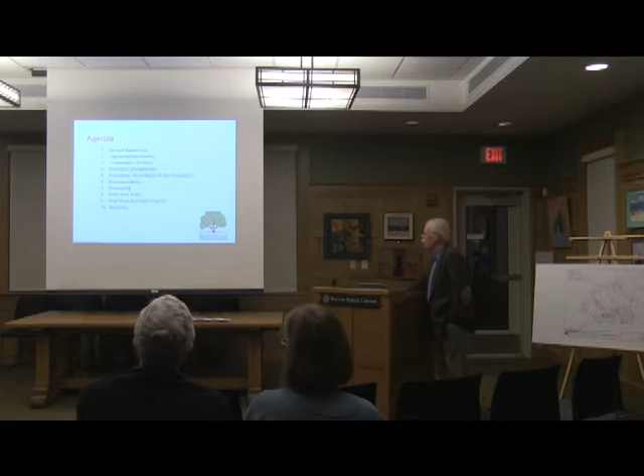Overall agenda: general background on where it was, how we organized the initiative itself, both from the project and fundraising side, and what we've gone through in terms of regulatory aspects, which are critically important. Environmental aspects, both in terms of contaminated land and soil, and water, as well as the wetlands issue - the site has a remarkable amount of wetlands on it, particularly up front near 117. Then we'll walk through the physical project: demolition and remediation, and what we call site preparation, which is basically where we've gotten to a large degree - preparing the site for building what will ultimately be the vision of the common.

What we're doing in terms of communication is a two-way street. We'll tell you what we're doing, and we'd like to hear what you think we ought to be doing, or whether it's working, or what you'd suggest we might add. Then we'll cover where we are with fundraising and near-term plans. I have a slideshow, about 6 or 7 minutes long, that gives you a perspective on pretty much everything that's gone on in the last 4 years. Actually, this project in total has been going on, believe it or not, for 7 years - 3 years before the trust got involved. So let me move on.

Background: after the town turned it down in 2011, the trust bought it, with Mass Development loans. Mass Development is just about the only outfit that has brownfield loans - they will loan money to people who are developing contaminated land, brownfields, into something useful, purposeful, and beneficial to the community or its economy. The primary objectives were to straighten out the environmental aspects, to turn the brownfield into something no longer contaminated and useful. At the same time, the trust certainly doesn't want to make money on this, but it doesn't want to lose money either. It's not a big organization.

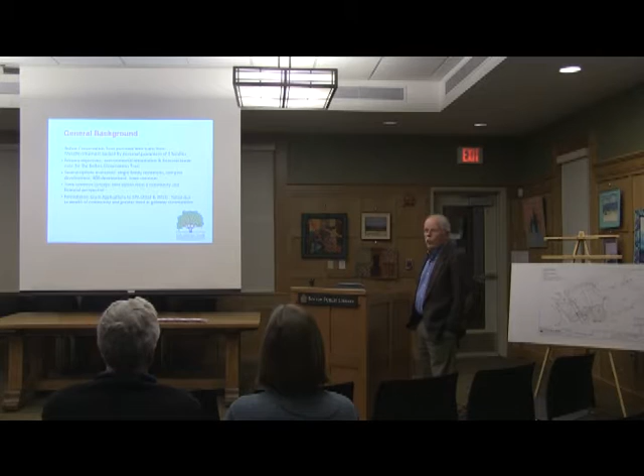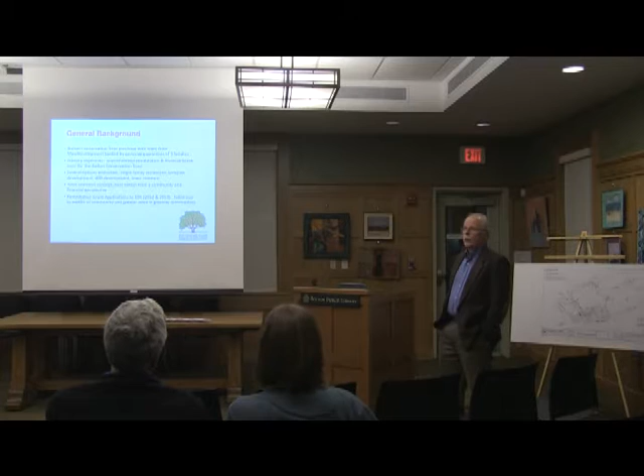You wonder why things have suddenly taken off in the last year with our fundraising. Two primary reasons. One, we spent a great deal of time looking at alternatives for development of this land - single-family residences, even 40Bs, compact zoning, a number of things. No matter what we did, it didn't work. As I said, one of the biggest issues is the amount of wetlands on the land. Although up and back, where it rises, there are fewer wetlands, it's not particularly appropriate for any kind of development, nor did we feel it would be appropriate to do so.

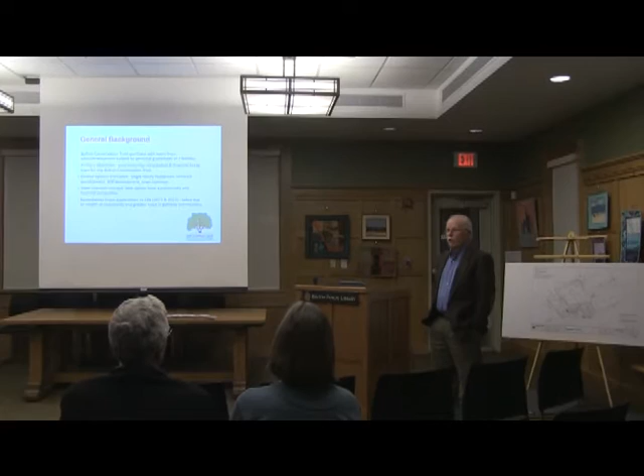We also spent a lot of time working to get grant money from the EPA. The EPA gives out grant money for brownfield redevelopment. We tried twice, very hard, and both times we were not given the grant. The message from the EPA was: you folks are the second richest town in central Massachusetts, and in terms of needs elsewhere in the Commonwealth, there are far greater needs. In both cases, the grants went to gateway communities, most recently New Bedford and Springfield in 2013.

In organizing the initiative, what was really practical was pulling together a team with fairly large group meetings, starting off with just generally getting concepts of how people saw the thing coming together. That coalesced more and more, so by the time we got through our 4th meeting in September of 2014, we had a pretty good idea of what the key elements of the project would be, and those key elements would be reflected in the organization.

The organization looks like that, and the reason it's illustrated that way is the incredible connectivity among the elements of the organization. We have a steering committee in the middle that's responsible for coordinating the elements of the organization, but we have 7 individual elements and groups.

The communications team on top, fundraising, of course—it's the most aggressive fundraising effort the town has ever seen on a private basis, in terms of the percentage of private funding going into the project. Construction, and that's construction and remediation. Of course, the finance. The charrette, you will go into in a bit.

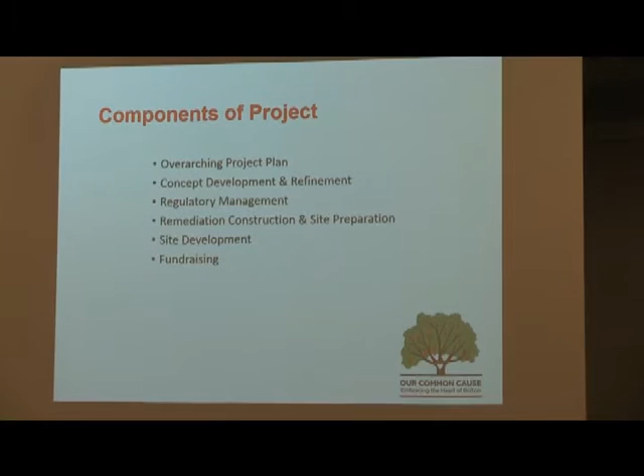Once we got our organization together and figured out where we should go conceptually, clearly we had to have a plan. We had to figure out, once we had a general idea of where we were going, what we needed to do in terms of developing the concept for the common and refining that to something buildable.

We simultaneously had to run a substantial amount of regulatory management, and that was basically 3 areas. One was the investigation and remediation of contaminated soil and groundwater, but we also had to deal with wetlands, and more normal administrative aspects of doing anything in a community like this—building permits, site plans, etc. Then the site development, meaning actually building out the site once we've gotten the contamination taken care of and the site itself prepared to take its ultimate development, and then finally the fundraising.

The overarching plan is a very large plan, very carefully put together. It's had a number of revisions. It's a living plan, now on Rev 4. You can't read that—I certainly can't read that at this distance. But that's basically all of the elements of the plan. Attached to that, each individual element has a plan of its own, which is updated. Some of them, I'm delighted to say, have accomplished their objectives and now have been archived for posterity.

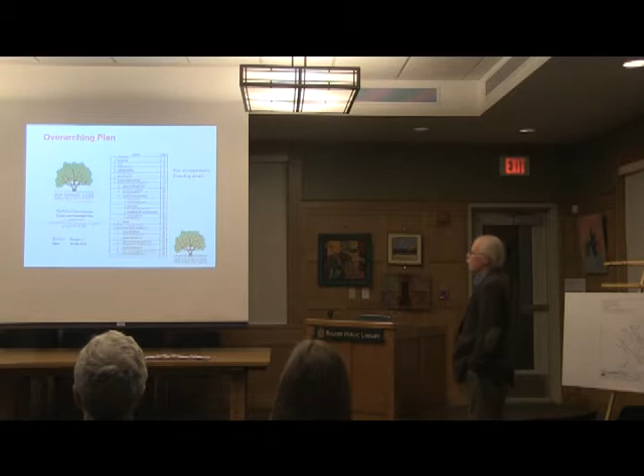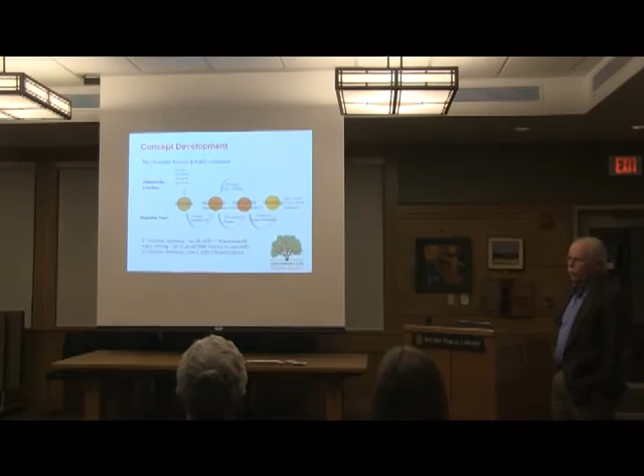So we had a plan. You saw, no doubt, the end of year before last, beginning of last year, a charrette process. We brought together 25 people with about 7 support people. We came up with a developed set of concepts. We brought those out to the public.

The public came back with some 900 comments. To a large degree, they were pretty easy to group. We incorporated them, and we came up with another charrette workshop and integrated all of the comments to the degree that we could into a single concept. That concept was put together and presented in the unveiling at the International on March 27th this year.

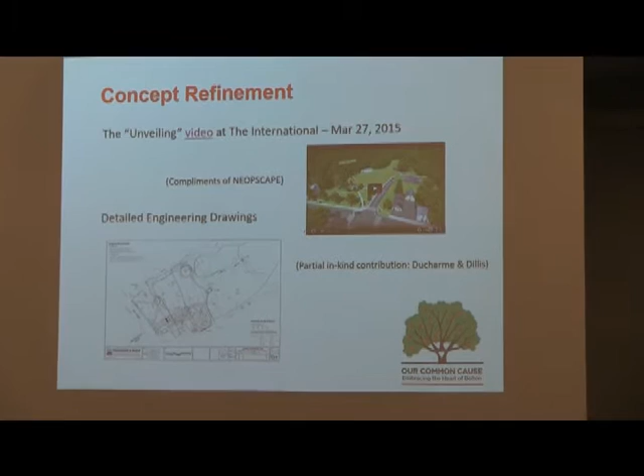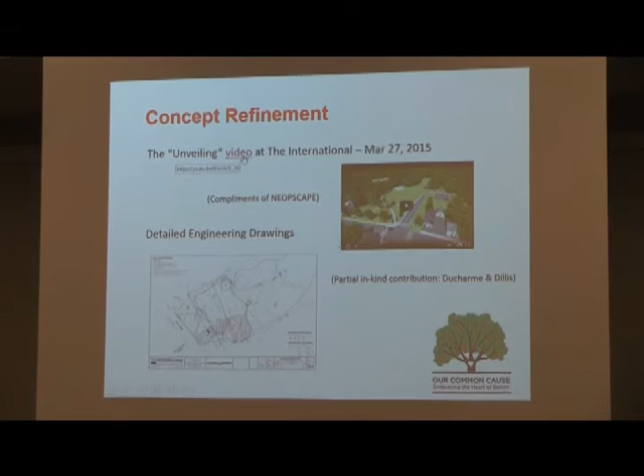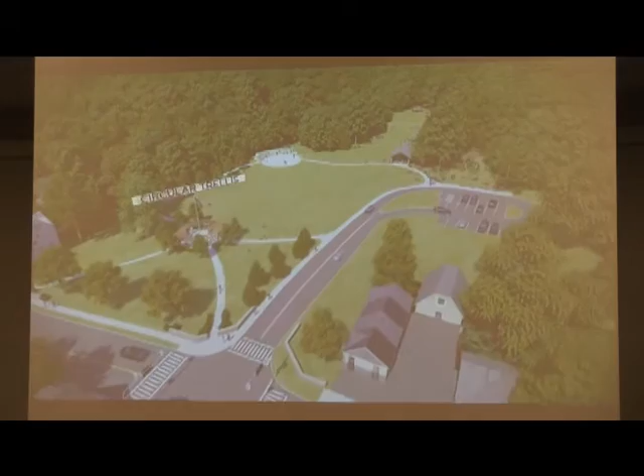This was the video presentation that Neoscape did for us for the unveiling. That basically reflected the concept coming out of the charrette.

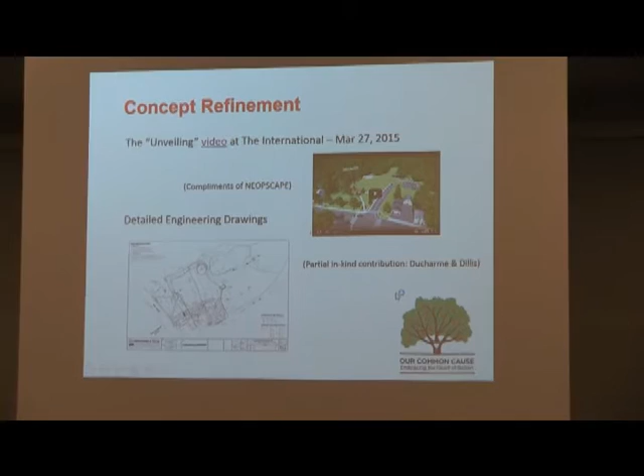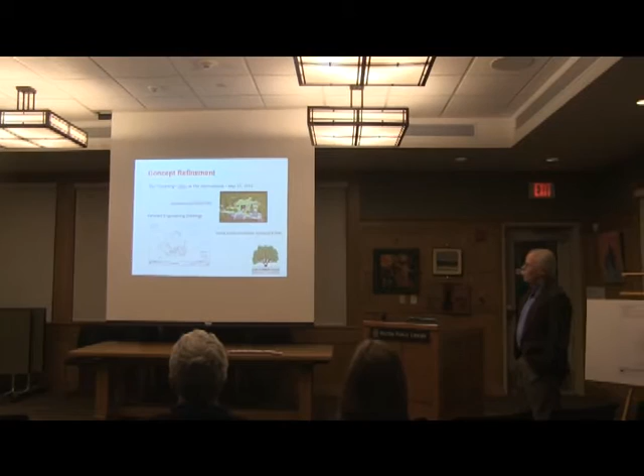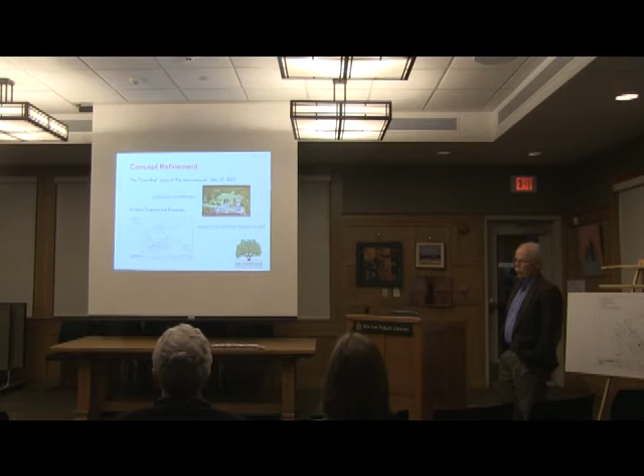So we came up with the concept, we presented the concept, and then in order to actually build it, we had to go through detailed engineering. Ducharme and Dillis put together the detailed engineering for us, which was substantially more complicated than it would appear from here. We had to have drainage plans, site reviews—a great deal of engineering went into it. Frankly, a lot of engineering went into it to make the construction easier and less expensive. It could have been a very straightforward but very expensive process had they not put a lot of thought into how to do it.

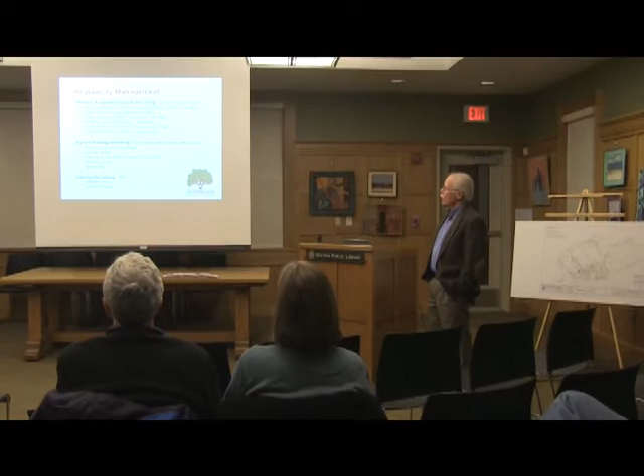Regulatory management: wetlands, I mentioned. We had to go through a whole series of interfaces with the Conservation Commission. Right up front, we had to come up with a complete ANRAD—an abbreviated notice of resource area delineation. That basically covers all the natural resources on the site: rare species, wetlands, et cetera. That had a lot of drawings and 34 pages.

They issued a response to that, basically endorsed it. We're absolutely delighted—the people who put together our documents had no problem with the regulatory authorities. They came back quite happy and in agreement. Same thing with the wetlands when we did the demolition.

When we did the construction, an enormous amount of engineering calculation went into that. Our notice of intent was the biggest we've ever seen, 110 pages. But it was well enough done that it got completely turned around and endorsed very quickly.

And then the usual site and building permitting, the demolition permits. In the case of 715, that took 9 months. Site plan review, again, great development of the permit applications, and consequently relatively few comments, some very good suggestions.

And then as we started towards demolition, we discovered that there's asbestos in everything. Things such as the tile and the floors put in the 50s were strengthened with asbestos. The glue on the ceiling tiles was asbestos to strengthen them. Even the glazing in the windows was asbestos, so it all had to be removed, packaged, and shipped to a location in Ohio.

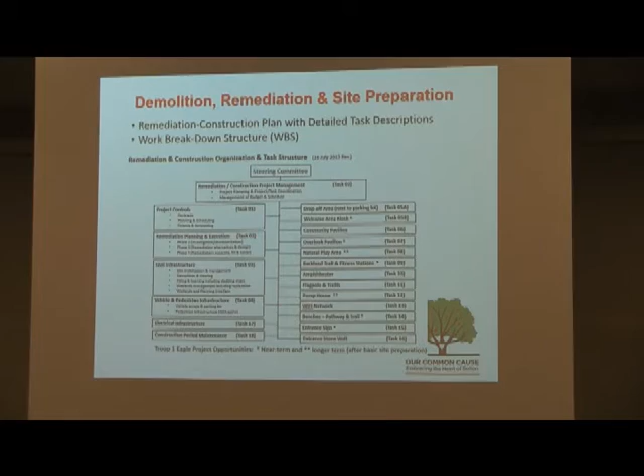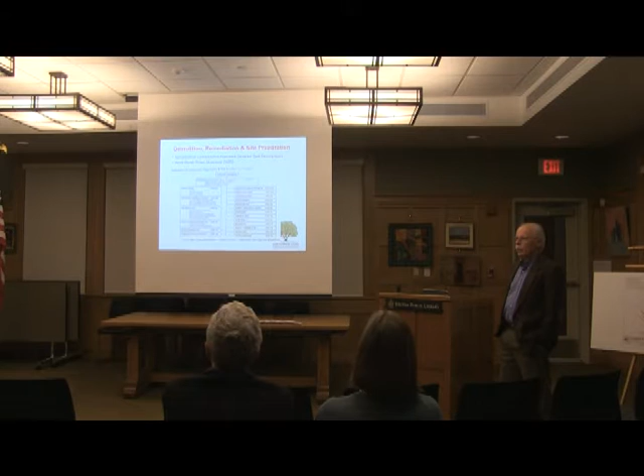Once we got through that, we had to figure out what we were going to do to actually build this thing. These are basically the elements of the project management plan for construction, all of the tasks. The ones on the left are building out the civil infrastructure, doing all the drainage, the filling, the road work, the parking lot, and by the beginning of spring we'll get to putting in loam and grass. On the right are all the physical elements beyond that, which, assuming we have the appropriate funding, we'll go ahead and build out next year.

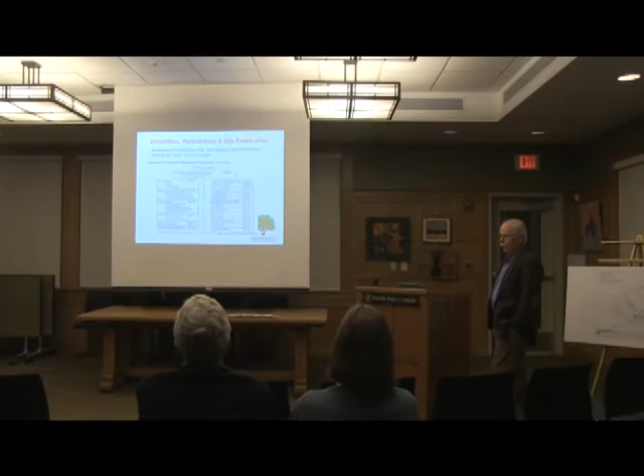The one thing I think is very impressive is the number of people who have volunteered to either lead, be a very important part of, or completely handle a number of these elements. The amount of in-kind support we've gotten from very experienced people with amazing resources, heavy equipment, fill, and a lot of expertise and advice has been incredible. I've never done a project with volunteers before of this size. It's a $1.5 million project, and without volunteers, doing it with a general contractor would have been twice that. It's just been great to have.

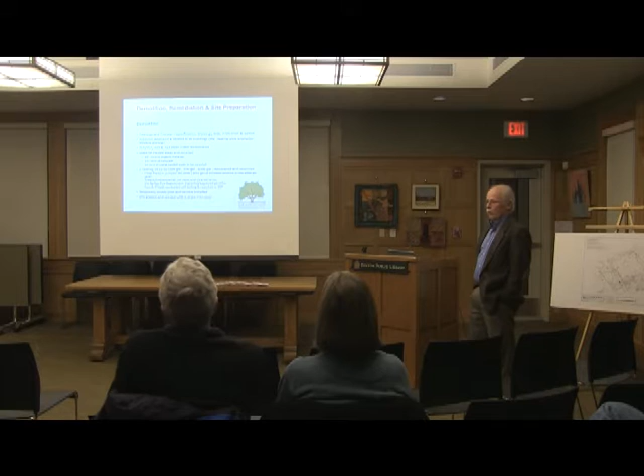The demolition, which was the first activity, was a very interesting experience. We thought we were demolishing buildings, and we were discovering tanks that we were not aware of. Nobody was aware of them. We thought all the tanks had been pulled and all those investigations had been done, and that wasn't the case. We found 3 more tanks.

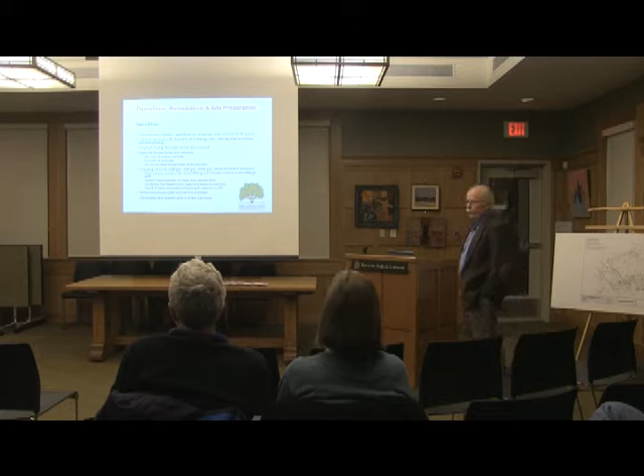We recycled everything. Everything went back up to Devens recycling. The organic material, basically wood, 187 tons of that, over 300 tons of concrete, and an enormous amount of metal. We pulled out all the I-beams and they went over to Reisner in Clinton, and we had some tanks that went to Reisner too after they'd been carefully cleaned. I think our greatest success was finally getting Verizon and National Grid to work together to remove a telephone pole. It took 10 people and 4 trucks, but we made it happen.

Remediation basically went ahead once we had the phase 4 requirements from our licensed site professional. We identified the truckers, the disposal facilities, and 2 primary types of contamination: one was petroleum, of which there was a great deal, and the other was lead, and they had to be disposed separately. As we excavated the areas where the wells and testing told us we had substantial contamination, we had to continually test to make sure we'd gotten it all.

And frankly, with petroleum, we hadn't gotten it all, and we had to dig again to get to the point where we were no longer detecting that level. So bottom line, 227 tons of soil went off to Maine, and 23 tons of lead was transshipped through New Jersey. Everybody kids about when you want to get rid of waste, you send it to New Jersey - no, it was the truckers who transshipped it to an appropriate disposal site.

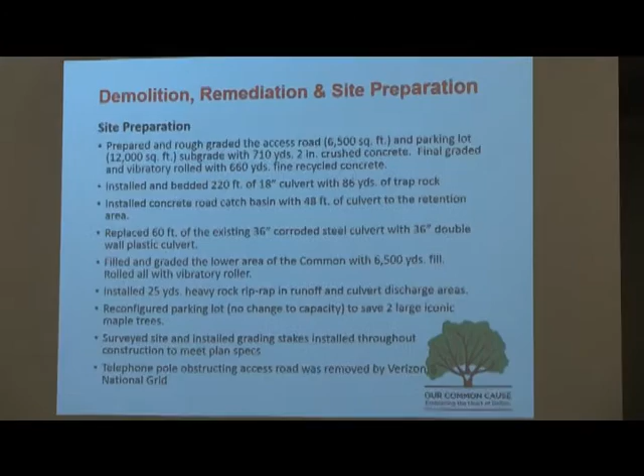Yeah, that's the theory. And in the end, when all of this is finished, there will be what's called an AUL, which will be registered with the land. That's an activity and use limitation document, which will actually lay out exactly where this stuff was, so you know - it's sort of like DigSafe. You need to know where it is, and that will be part of the outcome of all of this.

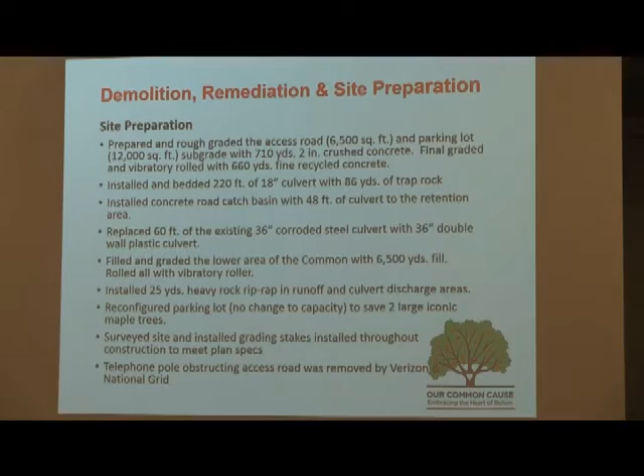Site preparation is all the activity that you saw going on with all the heavy equipment and trucks coming in the last 3 months. We did the rough grading. We put in a staggering amount - 1,500 cubic yards of crushed concrete and gravel in the driveways. I think I can say with certainty that the base for the road going into the common is better than 117.

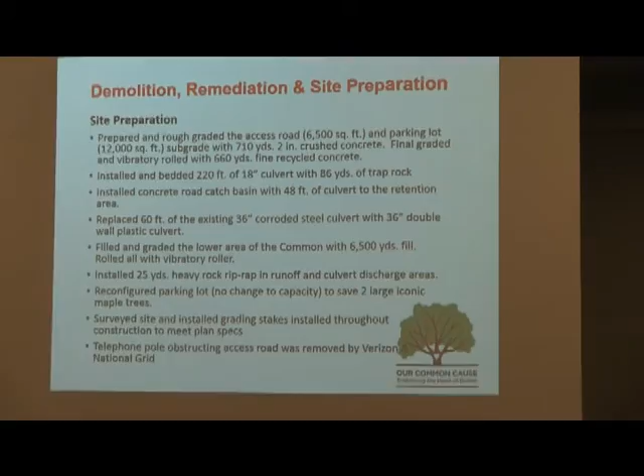Some people say - I'm not saying it - but all kidding aside, it's been very well done. It was done very professionally. We put in a great deal of culvert.

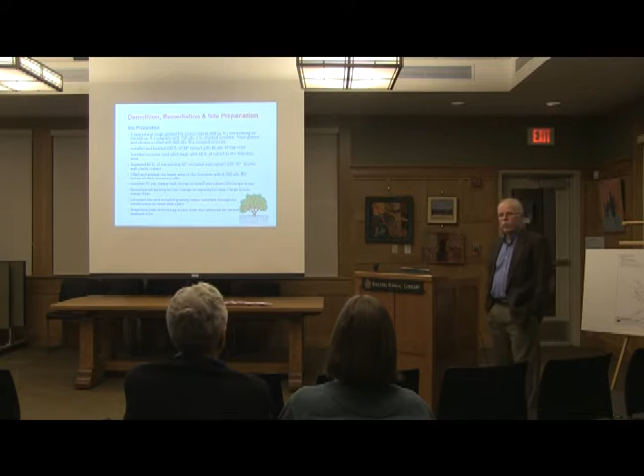One of the things we had to do was address Great Brook, which runs right through the center of the lower section of the common, through a 36-inch culvert. There was concern that in a 100-year flood it would overtop that culvert. Rather than open it all up and completely redo the culvert work, we reached agreement with the Conservation Commission using a very innovative approach suggested by Ducharme and Dillis: we would put a parallel culvert above the 36-inch culvert, so that if it ever did overtop, it would go through this long culvert and not do any damage or back up to the upstream properties.

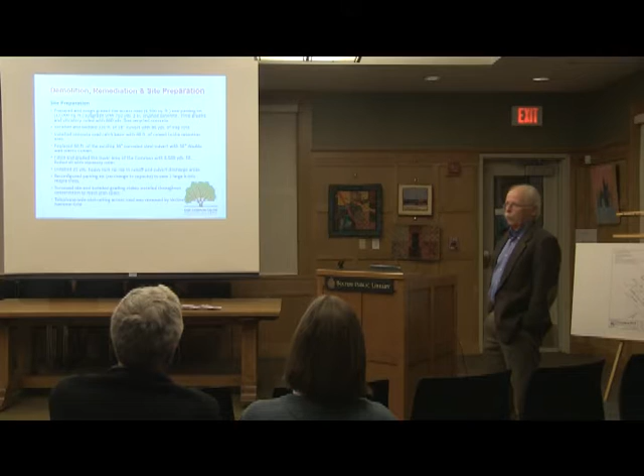So we put in 220 feet of culvert, which is not a small job in itself. Then, much to our disgruntlement, we discovered that the 36-inch culvert we depended on, and over which we were going to put the road, was completely corroded. We were going to do a quick check - we pulled in excavators, uncovered it to take a look, and in good conscience could not continue. We just ripped it all out and started over again.

We put in a total of almost 8,000 cubic yards of fill, which is why it looks nice and reasonably flat out there and looks much more like a common than it did before.

That was very carefully graded to get the runoff to come down the way it needed to and pass through those cones. One thing we changed from the original plans, once we started grading the parking lot, we saw 2 huge iconic maple trees on the east end and just didn't have the heart to cut those trees down, so we actually moved the parking lot. At the end of the parking lot you see those 2 huge maples, which we're very happy about.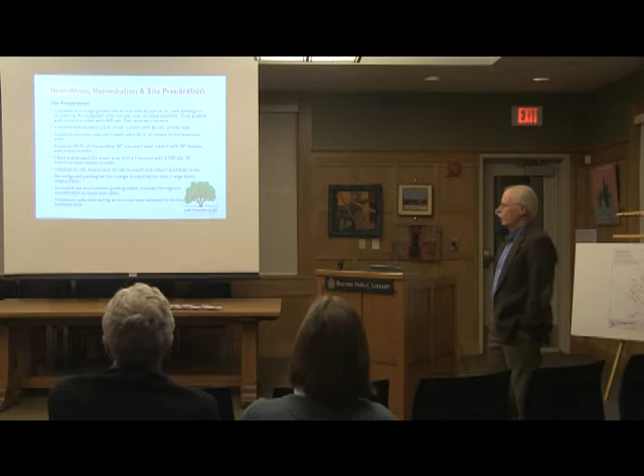And then, as I mentioned, we had that wonderful experience with Verizon International Group. In terms of site development, going beyond site preparation, the Boy Scouts in Troop 1, Dan Gaffney's son Jack, this was his Eagle Scout project, got a whole team together and with the support of Doug Story, being our expert on the scene, built the upper pavilion, which was used for Santa Claus during the tree. And then very recently, Rich Pelletier donated a pergola, and actually was down there constructing it with us.

So those are the two things that you see. In terms of future work, the next thing you'll see is going to be the loam. We need to get loam in there fairly quickly and seed it. Not just to make it look pretty, but to make sure that we stabilize the site and eliminate potential erosion in the future.

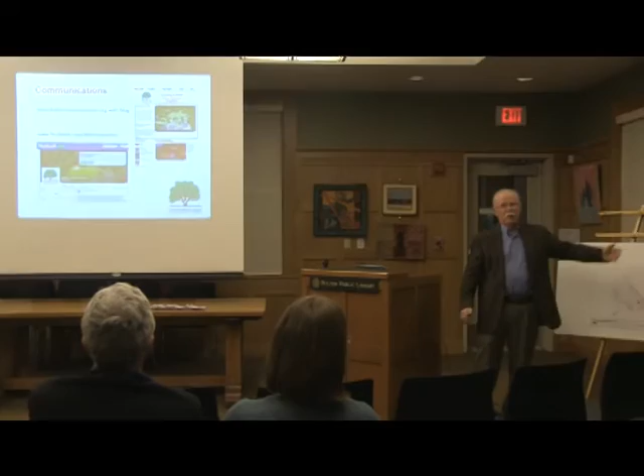Communications, you want to talk for a second about it? Sure, put you on the spot. Hi, I think I know most everyone. Meg O'Leary, I'm the co-chair with Bob.

On the communications front, communication is a tricky thing. Sometimes people say you're reaching out to us too much; other people ask where the communication is going to be. So you never know if you're hitting the right cadence. But we are trying to be as transparent as possible and keep people up to date. If you read the Bolton Independent, there's almost something in there every week, whether it's an event we're having or an article about our progress. We keep a blog on boltontowncommon.org that we try to update regularly with project information. Facebook has about 450 people following it, and we get great engagement there, so anytime we put something on the blog, we also promote it through Facebook.

And also, hopefully you're getting email updates, as well as through the Bolton Conservation Trust newsletter and regular press updates. But the other thing we're doing is neighborhood get-togethers. We've had about 5 so far. Different folks in different neighborhoods have offered to host get-togethers, and it's been a terrific way for us to get the word out about these events. We provide the cocktails and the food, and just ask you to invite your neighbors, keeping the program maybe 10-15 minutes. It's not really this in-depth, but it's a time to chat about things, learn more about the project, and enjoy your neighbors at the same time.

As I said, the near-term plans are we'll build out to the extent that we can with the events. What I wanted to do was just quickly run you through some photos.

Just the history of the whole thing in photographs, as it originally looked.

From both directions. What it looked like inside. It looked out back. More of what it looked like out back.

This is Rob Held, his soul rest in peace, who was very, very active in this. His tractor was always ready.

And this is the crew emptying the trailers, filling dumpsters, building trails, and maintaining the general area throughout. More maintenance - that's one of the things that is critically important. If you're going to do a site like this, you need to maintain the site as you build.

And this is our stellar team. More maintenance.

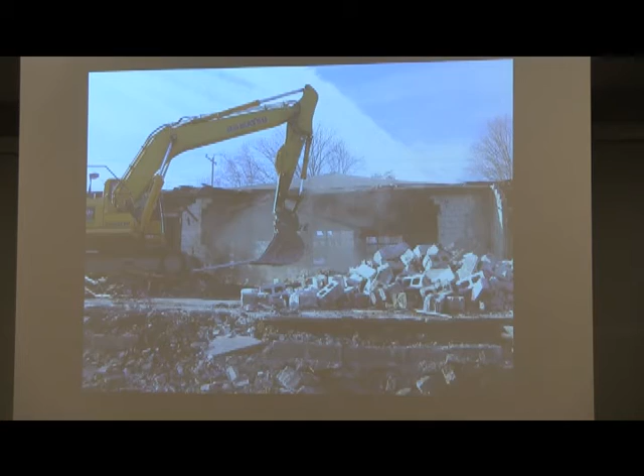This is the demolition of the garage itself, 715. What was left before it was shipped out to be recycled.

723. Sad to see them go, but we'll replace them, and we'll be better.

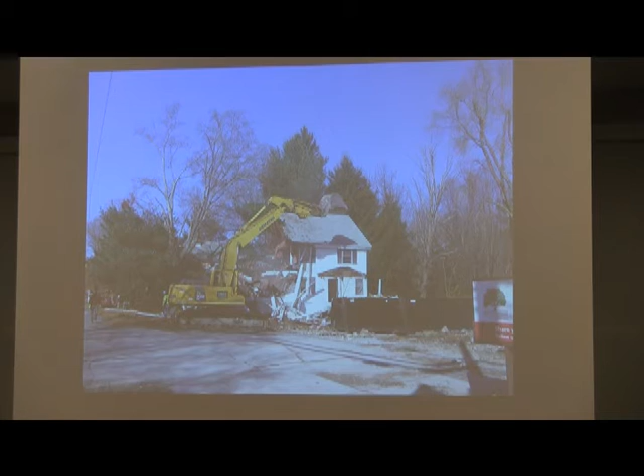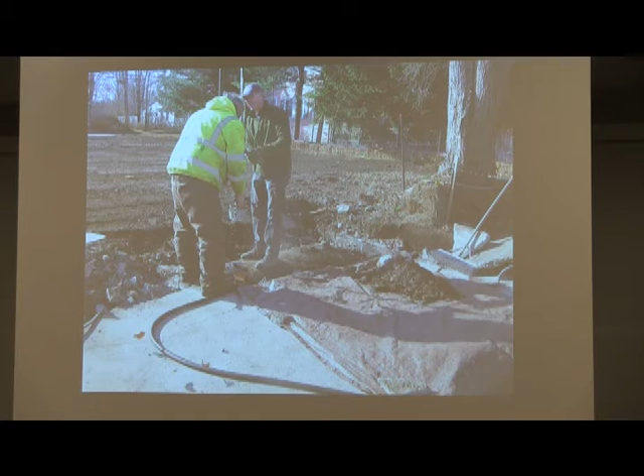That was our first exciting discovery - that was a tank that shouldn't have been there. And there's another tank that shouldn't have been there. That one was a fairly serious problem, but the one beside it was very serious.

We actually had to do a lot of sampling. We had to get permission to move forward. We had to file an immediate report with the state.

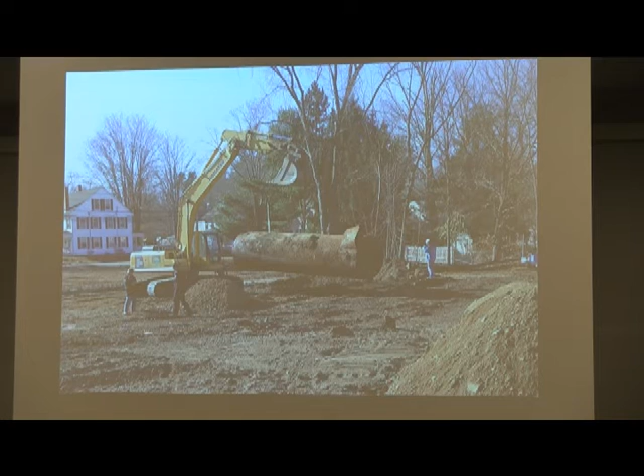And this was the third one, which frankly looked like a submarine - 6 feet in diameter, 24 feet long. And somebody had, quote, overlooked it. So we were quite surprised.

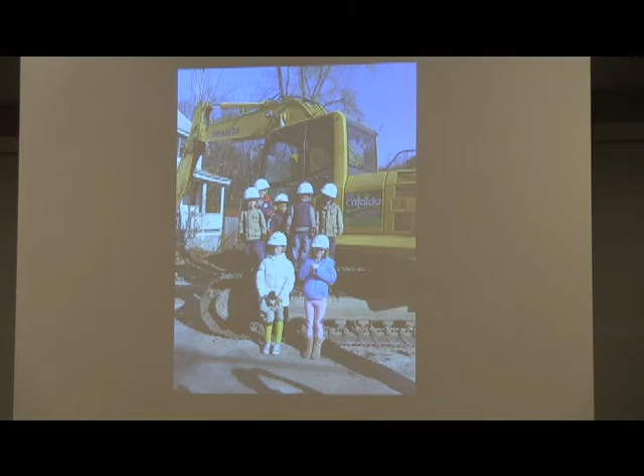This is our little celebration for the demolition and the hats that those who had contributed to the demolition got. This is the demolition team, and that was after the whole thing was completed.

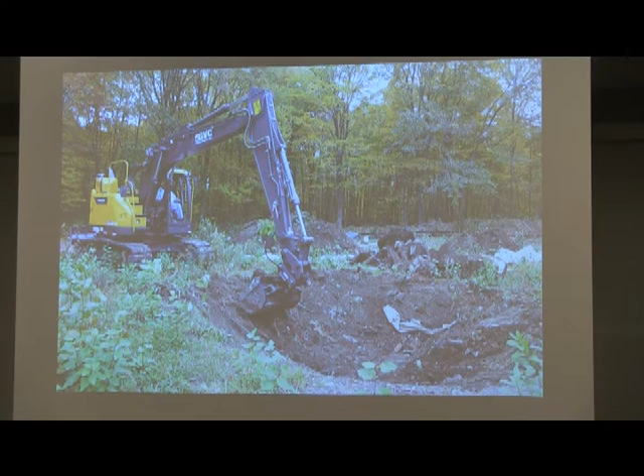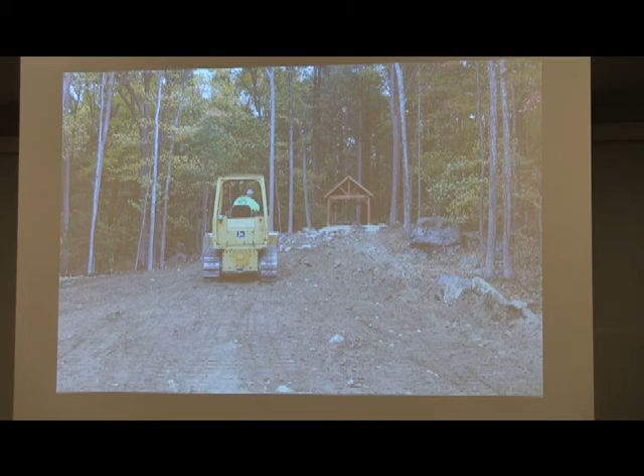And this is the excavation of the lead, the first excavation. Interestingly enough, we didn't find any of the things people predicted, colors and things like that. We just found dirty earth, more grading, more dirty earth.

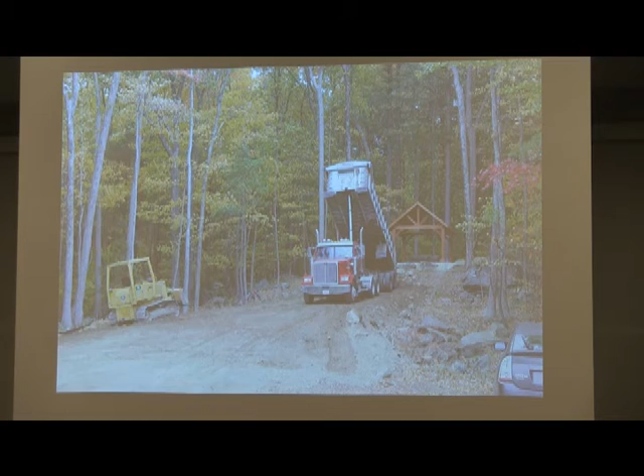More filling, and that's basically what they did - they just backed these 18-wheelers up and dumped them and then moved on. We had to put all the contaminated soil in plastic and then cover it so that there wasn't any erosion.

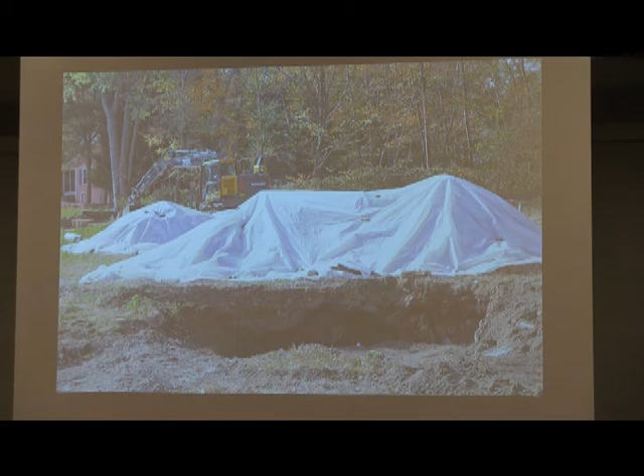Here's the covering team. That was lead, that was lead also. And eventually we did take out a lot of contaminated soil up in where the parking lot is now.

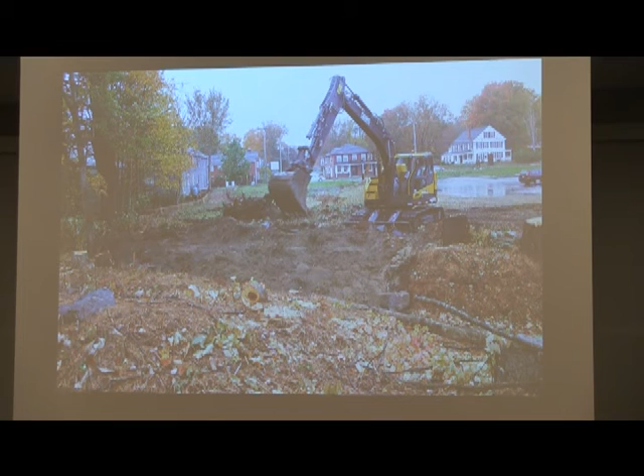This is the first layer of that in the lead area. This is taking out, we had to take out all of the stumps. When we cut trees, we were putting the access on top of it. Stumps eventually decompose, roads sink, so our decision was we'd take out every stump, which we did. And that was all done with volunteer equipment and labor, which was pretty impressive.

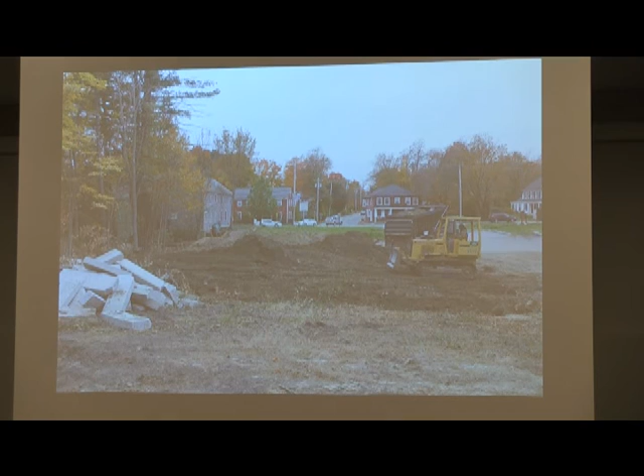And there we are filling where that whole stump area was.

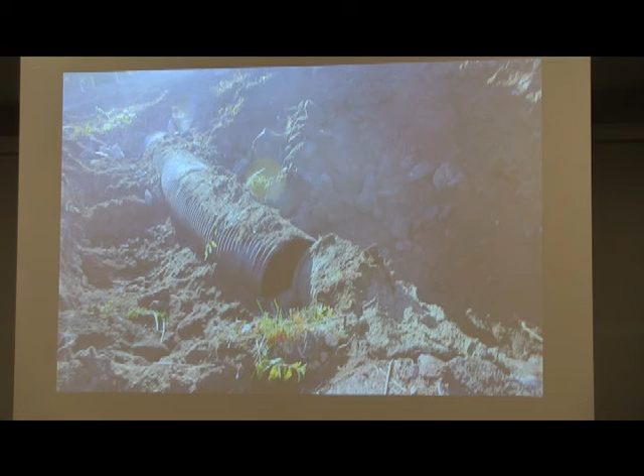This was the 36-inch culvert that we uncovered to make sure it was in good condition before we put the road over it. It wasn't.

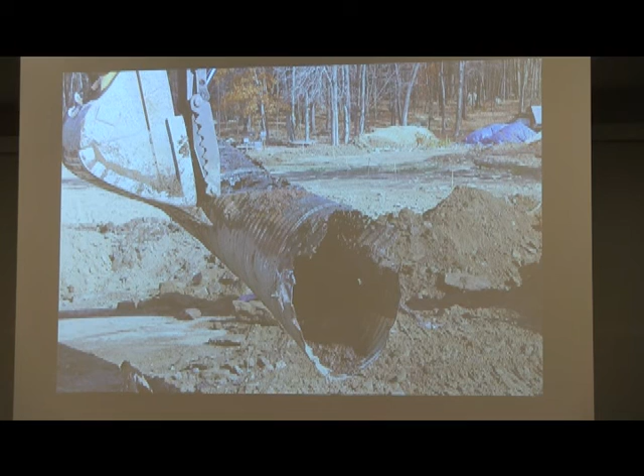There it is. And here's a more graphic example. That's what it looked like when we pulled it out. It was just absolutely hopeless. So what we had to do was pull the whole thing out.

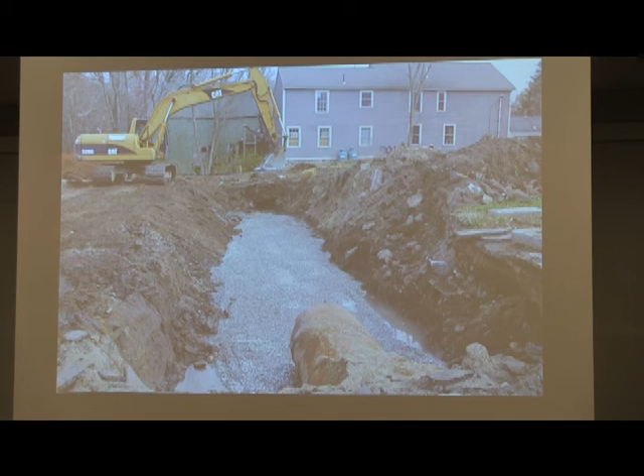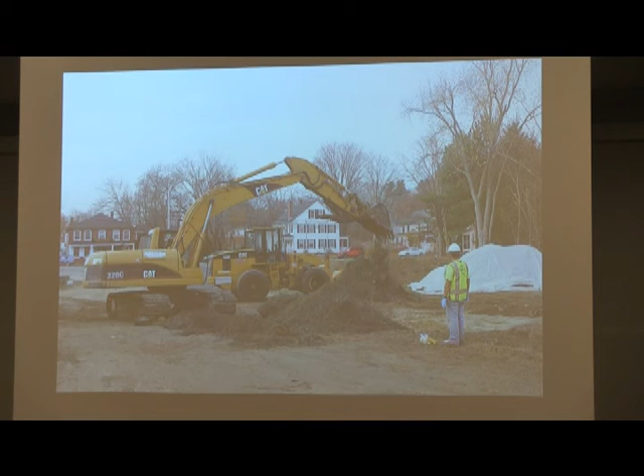We had to put a gravel bed in. We had to cut off - in the middle of all of this, and these are in sequence, we realized that we now had to excavate more contaminated petroleum. So we ended up taking out twice as much as we had originally. And that's the kind of stuff we had to dig through to get at it.

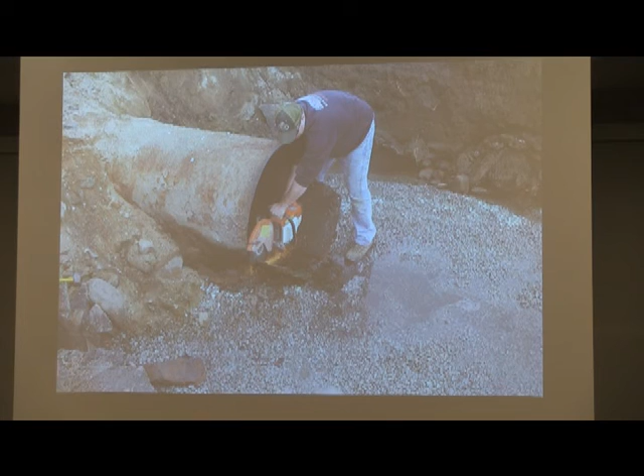This is Mark Milliken, one of the contractors who worked with us, cutting the pipe that was still good. And here they are lowering in the new culvert, and that's double-walled culvert. It's the only thing really that you can put under a road.

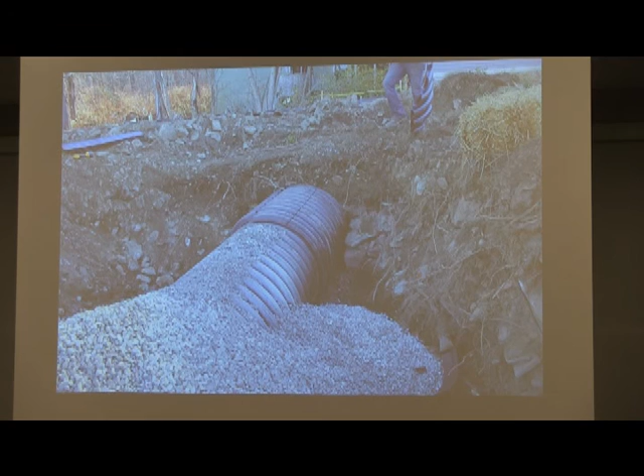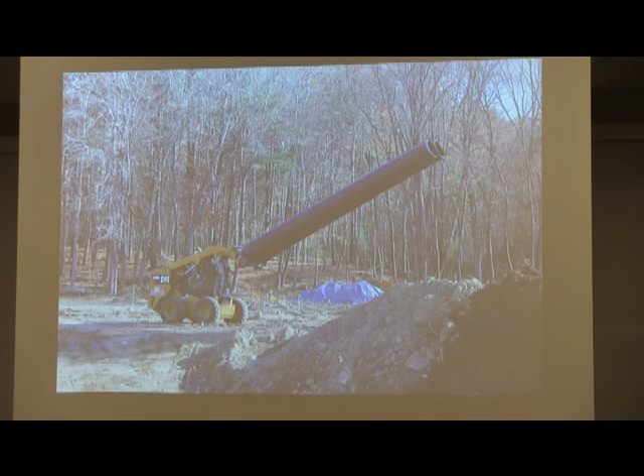And it all has to be backfilled with crushed gravel. This is our unicorn - this is the way they carried the smaller, 18-inch culvert through. And that's putting the 18-inch culvert in. Incidentally, all that had to be surveyed to a quarter of an inch in order to get the slopes right over a 220-foot run.

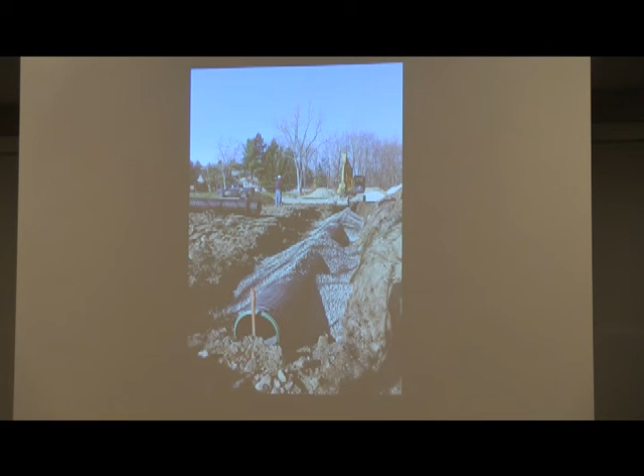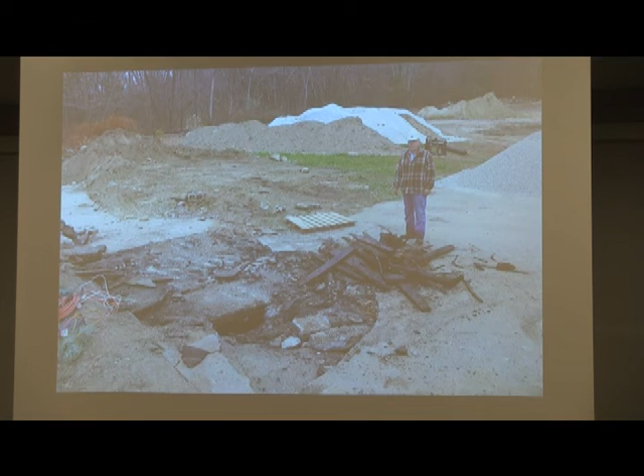Yeah, and this is why the existing culvert didn't work. That's what was jammed up inside it - it was all the concrete forms that had been used to build the culvert in the first place, which had fallen out of the top and jammed up.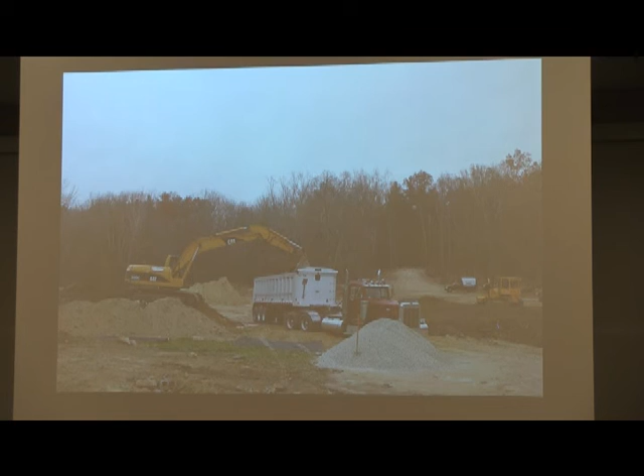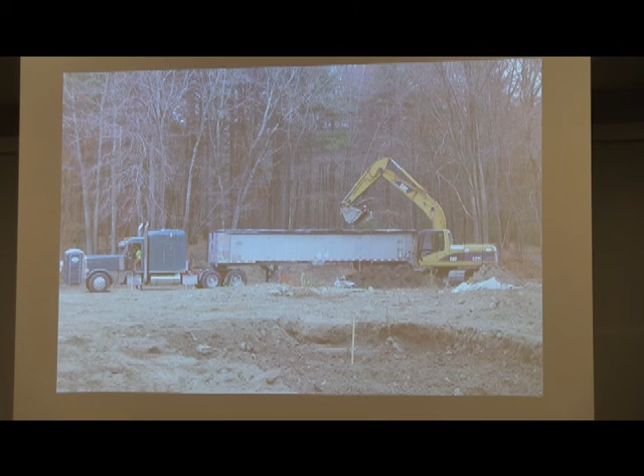The interesting trick here was to do excavation, filling, grading, surveying, and at the same time do the remediation in parallel with that. So we had 5 trucks at a time, on some occasions. This is more of the covering to identify the locations where contamination had been detected.

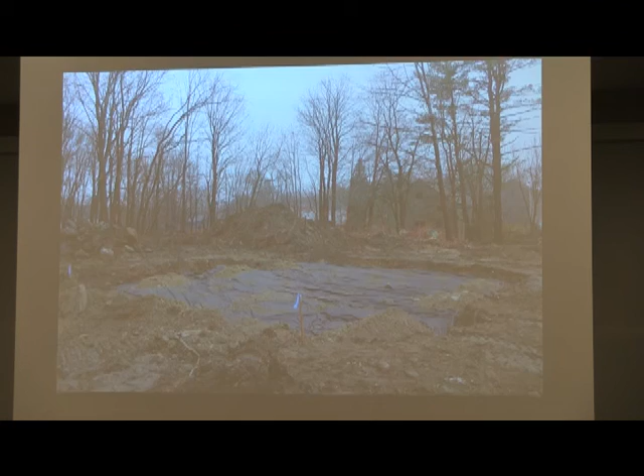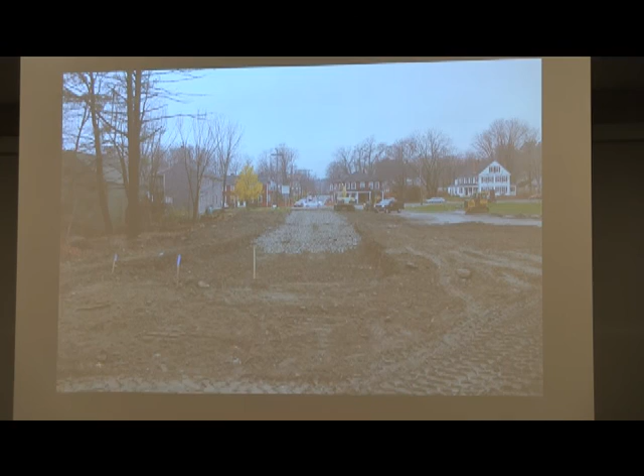This is the road moving up as we continue to fill it. You can see it's down about 2 feet, and we fill that whole area to get a very, very solid substrate, so the road is really, really solid.

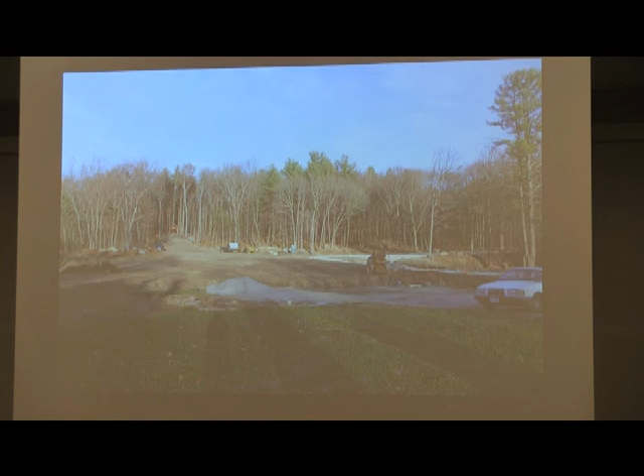Same thing - road at the base, the substrate finished. This is more of the filling over the contaminated area with this separation.

The final burying of the bypass culvert.

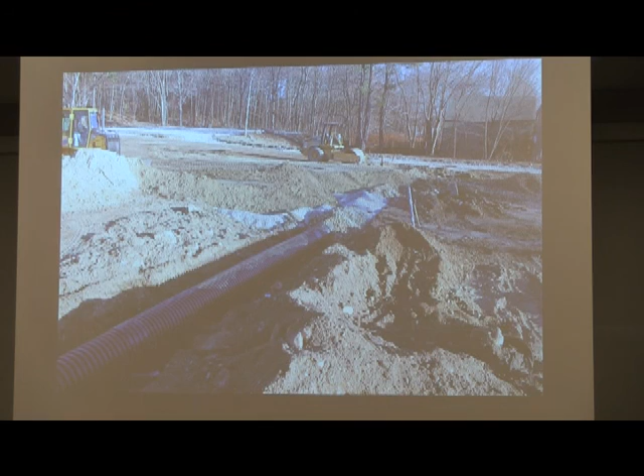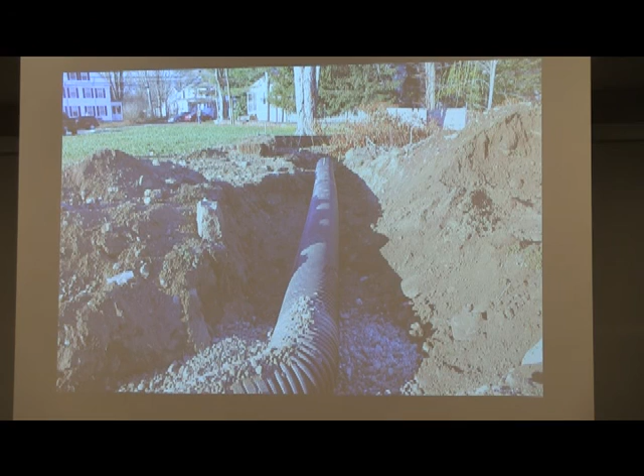Again, this was a combination of excavation, filling, and then very carefully surveying it so that it went in exactly where it was supposed to.

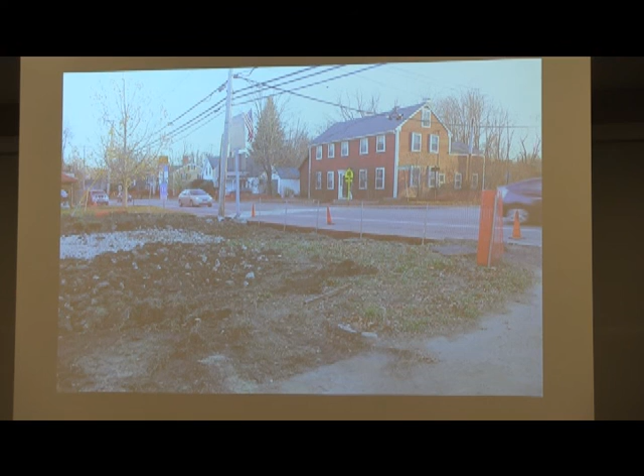This is its nose sticking out, and you can see the main culvert's below it, and it now has a screen over it to keep things from going in. The culvert above it, which is the bypass, I suspect it will never be used. I think once the culvert got cleaned, it was fine.

That was when we were rushing against weather, and we worked fairly late into the night.

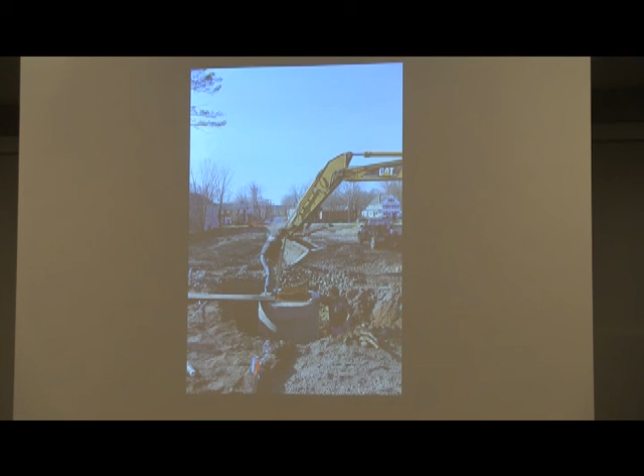The drainage in the road required that we put in very large concrete catch basins, so those went in under the road.

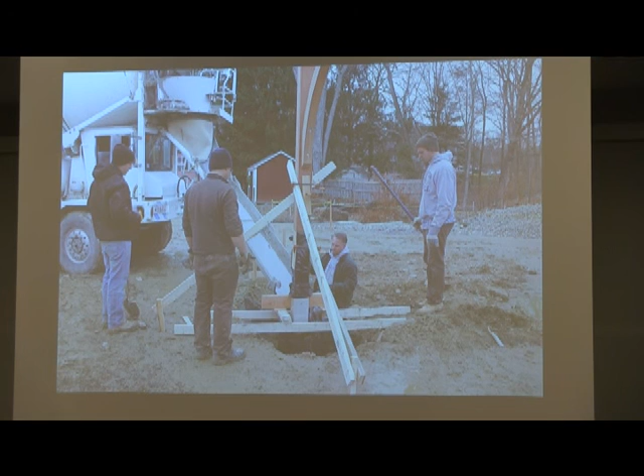This is Rick Pelletier deep in his project. And that's what it looks like now. So that's it.